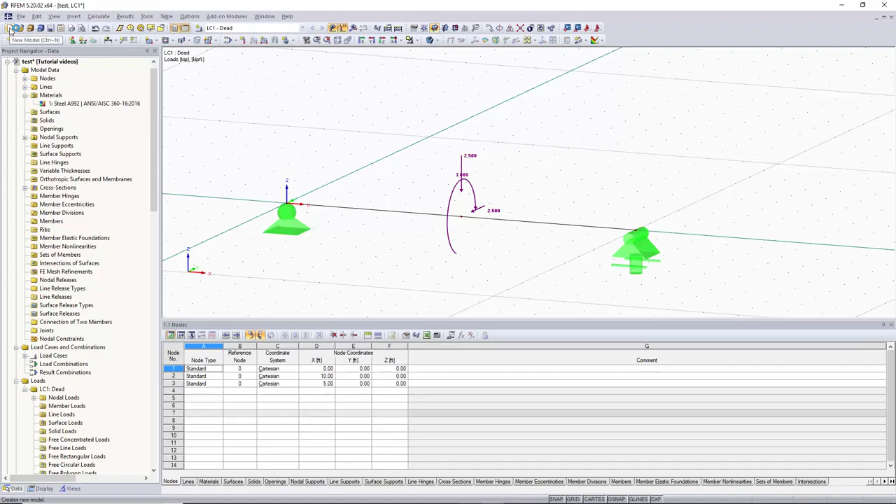To start off, we will create a new model by going up to the new model button. We can call this model video 6. Everything in here looks okay, so we'll click OK.

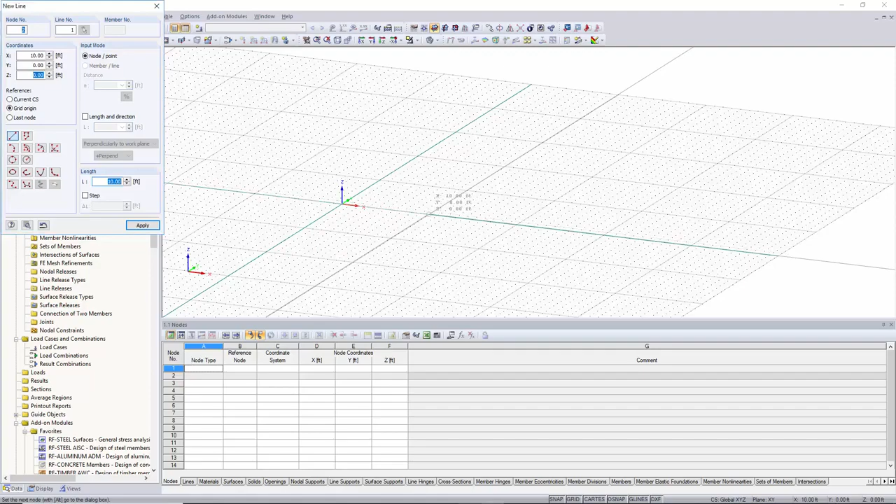As you can see, we have a blank grid where we can create our simple span beam, and to do this we'll just go to new line, and we'll just make it a simple beam from the origin 10 feet away along the x-axis. Now that we have our simple line, we'll add some line supports to this.

Our first end support will be a fully fixed support, and then our second end support, we will have to create a new one, and we're going to make this one restrained rotation about the x-axis, and we're going to allow it to move in the x direction. We'll click OK, and then we can graphically assign it to our beam.

Now that we have our beam, we would like to apply nodal loads to our beam. To do this, we can go up to this button up here called New Nodal Load. Since we don't have a load case created yet, when we click on a new load, it's going to ask us to create a new load case, and this pop-up window will come up.

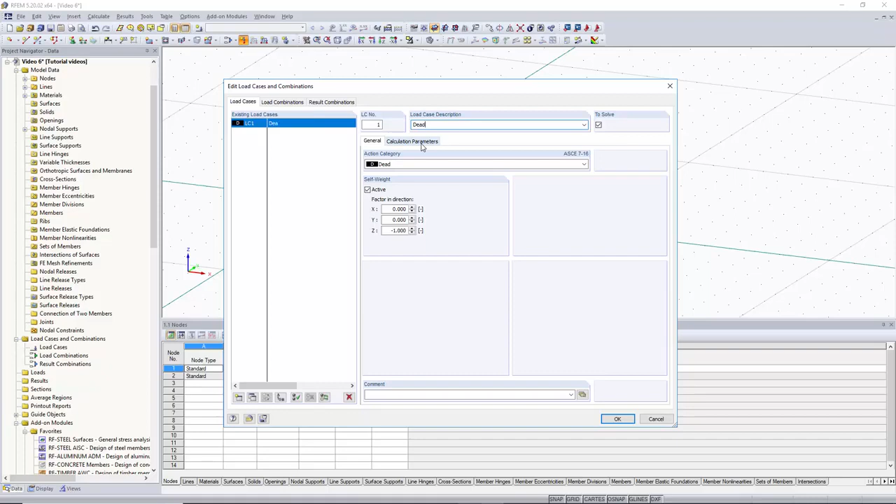For our load case, we'll just keep the action category as dead, and we'll name this one dead load. The self-weight is activated, and that's okay. We'll click OK. Now our new nodal load box pops up, and as you can see, you can pick which way you want your point force to go, either the X, Y, or Z direction for your point force.

And on the right side, you can create a moment and pick which axis you want this moment to rotate about. For now, we'll have a -3 kip force in the Z direction, and we can also apply a rotational moment about the y-axis, and we can make this one 3 kip feet.

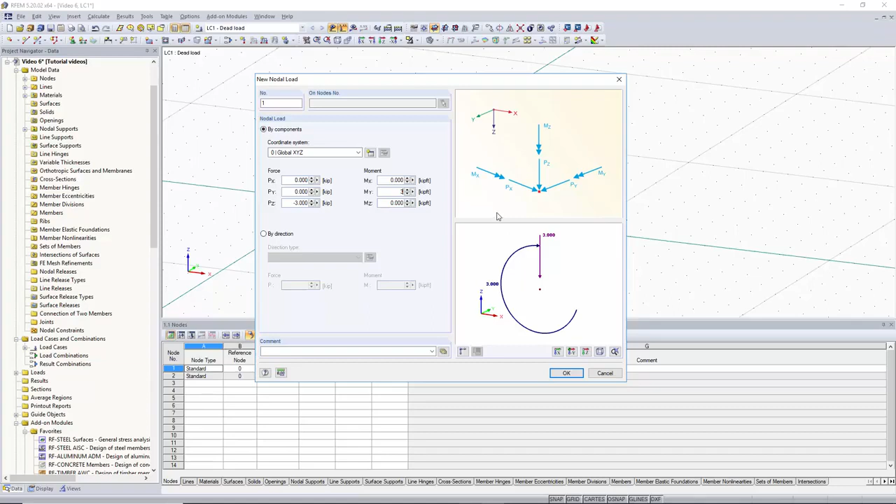In the bottom right hand corner of this window is a graphic area that shows you the loads that you are about to apply to whatever node you're going to graphically select. Once you hit OK in this window, you will see that your cursor has an icon next to it. This means that you can apply these loads to any node you would like.

For now, we'll just click on one of our end nodes, and now you can see graphically the loading that's applied. We can right click anywhere in the graphic area, and this will cancel out our selection. Now you can see there are no nodes along the span of our beam.

If you want to apply a load somewhere along the span of the beam, you're going to have to add a node. So to do this, we can go up here to the button called New Node, and now you can add a node using the coordinates, or you can also do it graphically.

Right now we'll do it graphically, and you can see that when selecting, your cursor will snap to the exact midpoint of the beam, which is 5 feet. We'll left click, and then we'll right click anywhere in the window, and now you can see that we have a node in the middle of our span.

With this node here, we can go up to our new nodal load button. We already have our load set. We can also change any of the loads if we would like, or add a load, or decrease or increase the load. We can click OK, and now we can click on the node that's in the span of our beam and apply the loads that we want to. We'll right click anywhere in the graphical area to cancel out the tool.

And now I'd like to show you how to add nodes to multiple points on the beam instead of just the midpoint. We'll delete our loads, and we can also, by highlighting the node from left to right, select it without selecting the beam and hit delete.

To add multiple nodes to the beam easily, we can go to the line, right click, and click on divide line, and we can do this graphically. You can see this pop-up window comes up where you can pick the spacing and the difference between the spacing and apply nodes that way.

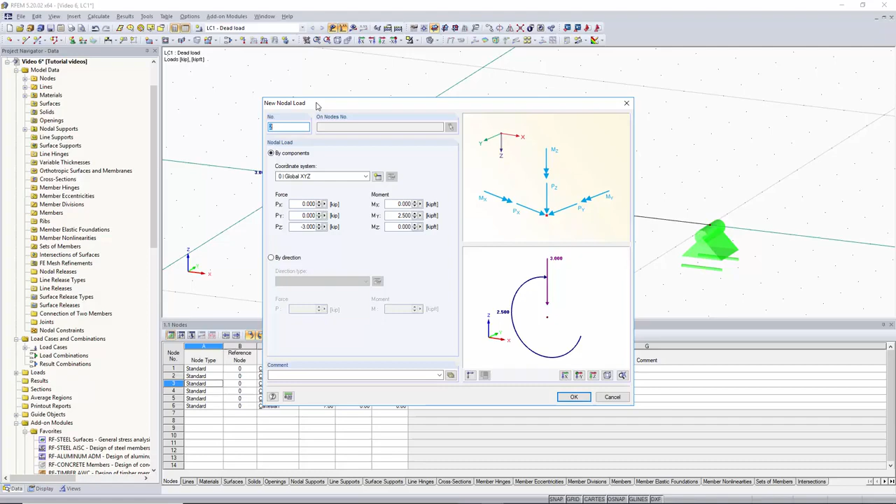We can then go to our new nodal load button and click OK, and then we can click on our nodes and add our nodal loads to them very easily. As you can see, our member was divided up into separate members. We can easily get rid of these loads by clicking Ctrl Z and get rid of our nodes. And now our line is back to just being one single line with no divisions.

You can also right click on the line and divide the line by n intermediate nodes. So now you can pick how many nodes you would like to divide the line by. We'll keep it as 1, and we'll click OK. And now you can see that it equally divides the line up with one node in the middle.

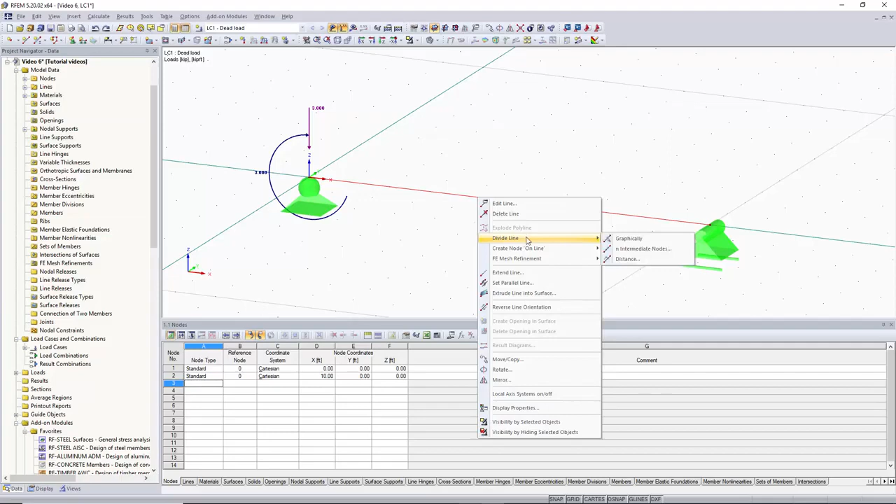Now if we would like to divide the line by the first quarter of the line, we can right click on the line, select divide line, and go to distance. The first thing we would like to choose is type of division. We're going to divide the line by new intermediate nodes. You can also place a node without dividing a line if you'd like. We're going to do this using the true line length of 10 feet. You can see how this works up in this graphic area.

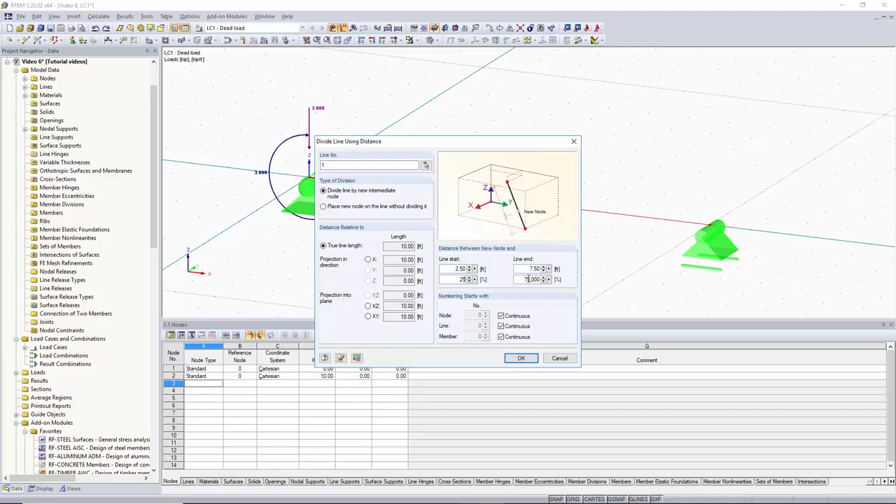And then we want the node to be placed 25% of the member length away from the start of the line, which is 75% of the member length away from the end of the line. And you can see that automatically adjusts over here. So we'll click OK. And now we have a node that's 2.5 feet away from the beginning of the line. And we can apply our nodal loads by clicking new nodal load, clicking OK, and clicking on the node.

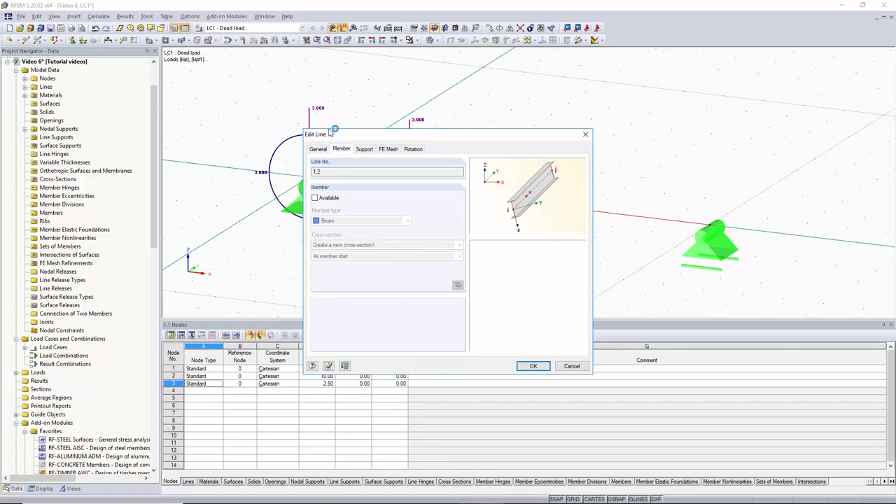Now we would like to run our results. Right now there's no cross-section or material set to our line, so we're going to select both of our line segments, double click on them, and then the edit line box will come up. Up here in the member tab, we want to click member available. We can then go to our cross-section library and select which cross-section we would like to apply. We'll just apply a W30x90, click OK.

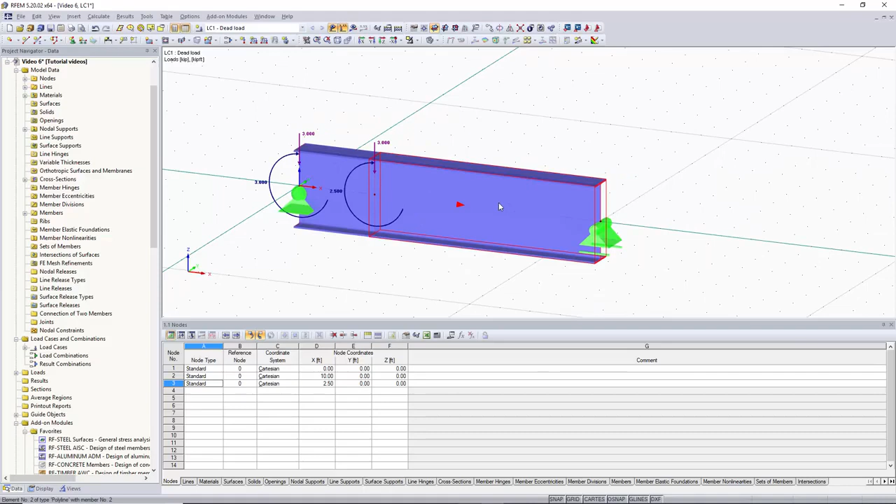And as you can see, our material is set to steel A992. We'll click OK. We'll click OK again, and now we have our rendered cross-section and material along with our loads. We'll run the results, and as you can see, turning this into wireframe view, we get our deformation along with our member diagrams for our moments and our shear.

So thank you for watching. I hope this video is useful, and now how to apply nodal loads is more familiar to you.